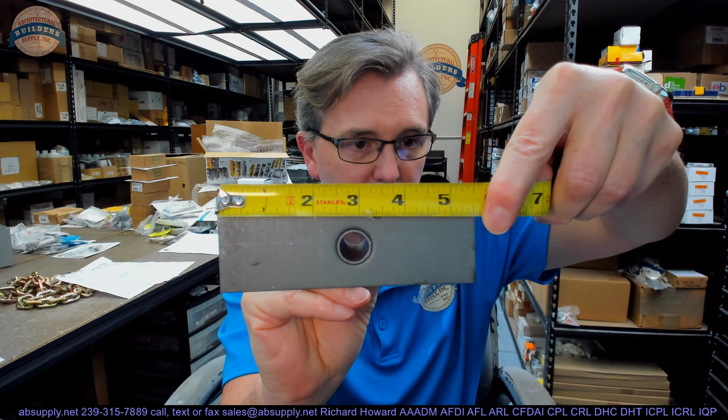Let's stop there. Internal reinforcing, that's the other part of what this is. When you install this, when you snap this into the frame, you'll notice this is for an unequal frame. I can tell that it's off center. One edge to the center of the hole is about 2 7/8. The other dimension is about 2 5/8. Okay, that's because this would be intended for an unequal rabbet frame.

If you had an equal rabbet frame, this will give you fits, because this won't reach over far enough, and this will be too far, and you'll have to cut it. Most frames, I think, are unequal rabbet, but not all. Be mindful if you're ordering these anchors, know that you're getting them for equal or unequal rabbet. It's a botheration if you have to try to make this work for the wrong frame.

When you turn the frame over, after you've drilled your hole, you'll center this over the hole or the dimple that you've created, and you'll rotate it in place. Now this will be sitting in the frame, and you'll weld here and here, and most people don't, but I would weld down here and here as well. They use the term internal reinforcing, and that's this tube. Oh, it's called a tube anchor as well. Type, existing wall, obviously. Tube anchor, I may have said that originally.

But when you have welded it in place and you get the frame up in place, here's the reinforcing part: as you tighten the screw, this is going to prevent the frame from being bowed or crushed in that orientation. As you tighten the screw down into the soffit, it's going to make the frame want to spread out. This is going to prevent it from happening. That's the other part of what this does.

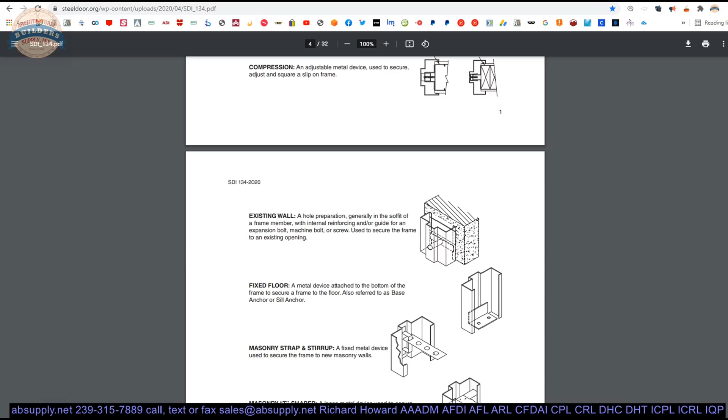So used to secure the frame to an existing wall. That's indeed what this is for. Also prevents you from crushing. Let's switch to the screen view now, and let's just take a closer look at how that might actually look in cross-section. All right, here's that definition, existing wall. That's what it's going to look like.

You know, they're showing that attached. This is a generic representation. This plate that's here, that could represent if you're going to line the opening with some steel, I suppose, or maybe something to weld to. But in cross-section, what it's going to look like is going to be

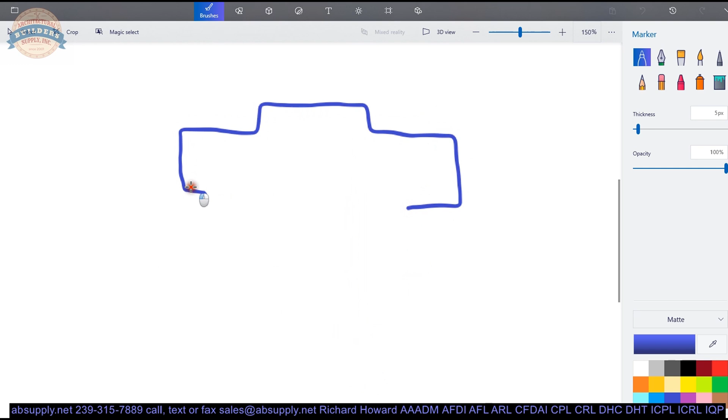okay, that anchor is going to fit here, that flat plate. Your tube is going to generally fit here. You're going to weld here, you're going to weld here, okay? Weld here, weld here. You'll dress these welds, grind them down a little. You don't want any slag build up on the face of the frame. There's no reason for that.

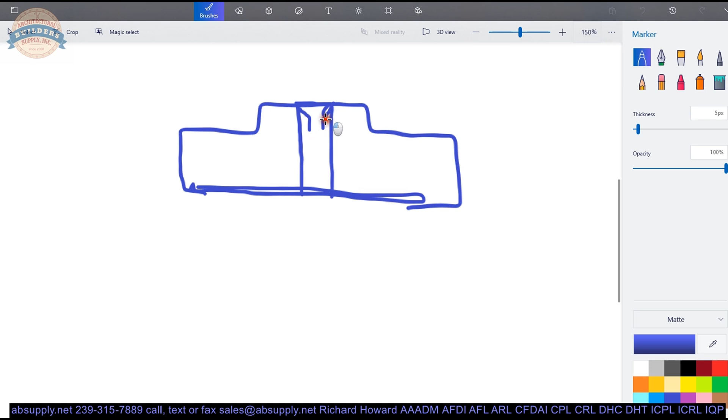Now, then, you've got a little hole that's drilled, and one way or another, you're going to dimple it, however of those three methods that I had said, and you're going to make it look like that. And then your sleeve anchor is literally going to fit, or your machine bolt, or your wood screw, or your machine screw. You get the concept.

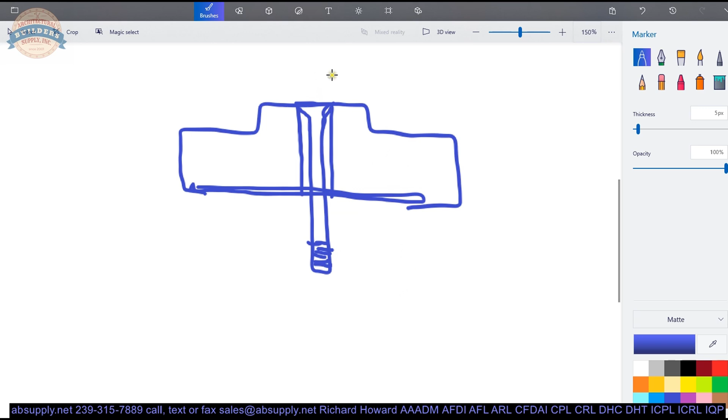But when you tighten this, that forces it down. That's going to want the whole frame to crush, splaying out the outside situation. That's why we like to weld everything together. And very often distributors of these frames don't weld these anchors in. They just put them in and that's it. And that will work, but I don't recommend that. The problem with that is it defeats the purpose of preventing this action from happening.